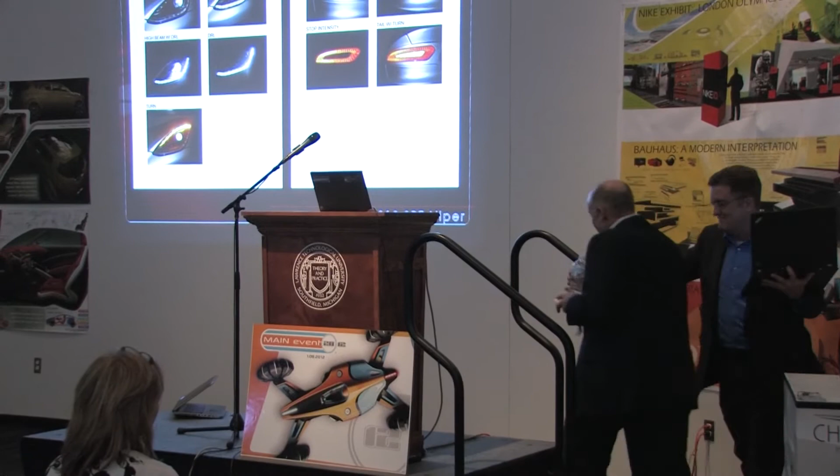Well, thank you, Paul, for that nice introduction, which I wrote, of course.

If any of you were at our winter event in January at the top of the Renaissance, I talked about the American car business being back. If you saw that presentation from Bob, you can see that we're back. And it's all credit to all of you in the audience who are car designers, engineers, management, who are in the auto business, that you stuck with it during the valley, and now we're riding the roller coaster up to the peak.

So I want to congratulate all of you for staying with it and for just designing great cars. And this is what I said at our winter show: the press is usually the last people to know these things. But it's on the cover of Time magazine from January, how America got started selling cars again. We never forgot how. It's just the market changed, and we're now the new growth engine for the American economy.

And I'm proud to say that Dassault Systèmes and our CATIA brand in particular is a part of that, and has been a part of the industry for 30 years. It just so happens that the North American Truck of the Year, the Range Rover Evoque, was designed using CATIA. And the North American Car of the Year, the Hyundai Elantra, also designed using CATIA. And of course our first speaker from Tata, they actually own Land Rover now. So you can see it's been a pleasure for us, and an honor for the Dassault Systèmes product line, and specifically CATIA, to serve your industry.

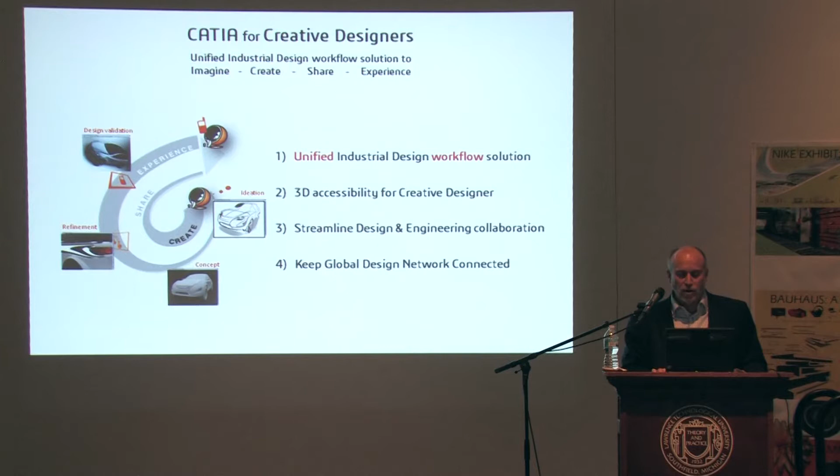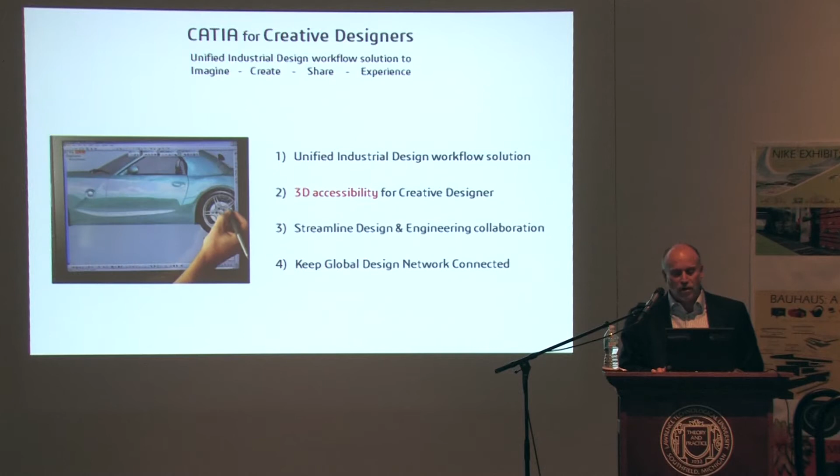We also want the creative designer to have access to 3D. Here's an example of a designer sketching on an existing car model. We want to help you design like you think. You think, hey, I want to change the roof line. What if I made the roof line a little taller? What if I made it a little shorter? This is how we think as designers, and these are the kinds of tools we want to let you use intuitively - what if I just pull this up a little bit more?

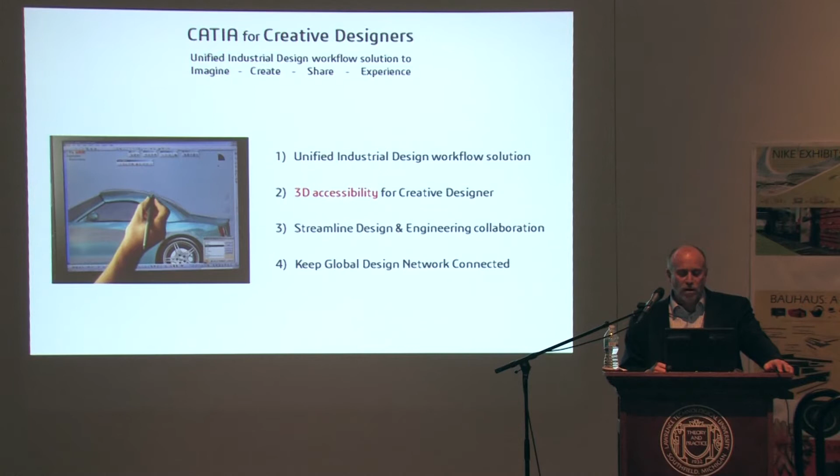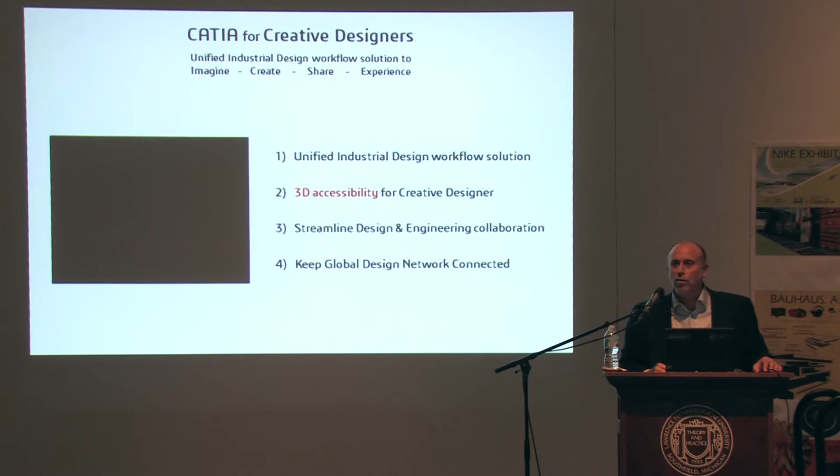You see sketching tools. My colleague Andre Clemens, my partner in the business, has been demonstrating our sketching tools, and he can give you a better hand with it. You can try it - I saw some people in the audience over there sketching. It's very easy to use, very easy to learn, so give it a try. We want to make that accessible for creative designers.

We've got to streamline this engineering and design collaboration. You may have seen these kinds of charts before showing what we call flow ruptures - when you design, then pass it over to engineering, then design some more, a lot of work gets lost in the translation during that handoff. So when people are using the same tools and it's more fluid, you get a more efficient design process that gets the product to market faster.

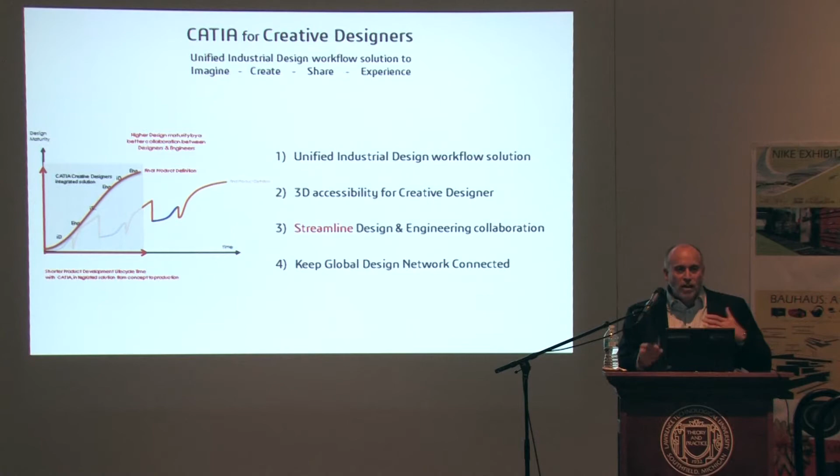We've found that people using this integrated approach get a better quality product, because the product is better designed and you have fewer problems down the road. Because engineering and design are working together, you still get the visual and design style you're looking for, but you also get a better engineered product through better collaboration.

In today's world, everybody's working globally. If you don't have a design center in another part of the world, you certainly have one in another part of the city, because you've got suppliers all around the United States, or certainly around the Detroit area. We offer the ability to collaborate and stay connected, whether it's across the hall or across the globe. So these are tools.

You saw some of that demonstrated this morning. In the Tata presentation, he showed an engineer and a designer collaborating and working together. So you've already seen this stuff, so I'm not going to show you all that again.

This is our end-to-end workflow in a little more detail. And we've added what I'm calling our community or our social networking approach.

When you're looking to get inspiration, when you're looking to get creative, one way to get creative is to connect with other people. I know that when you're trying to solve a problem, sometimes you just sit down with a couple of people with a whiteboard and start sketching things out, coming up with ideas to solve problems or fresh ideas just by working together. I think this is part of the design process, this collaboration.

So we offer tools for people to be networked together in a structured way. You can think of it as Facebook for engineers and designers. It's called our 3DSwYm solution, or our 3DSwYm offering. I'm not going to really demonstrate it much today.

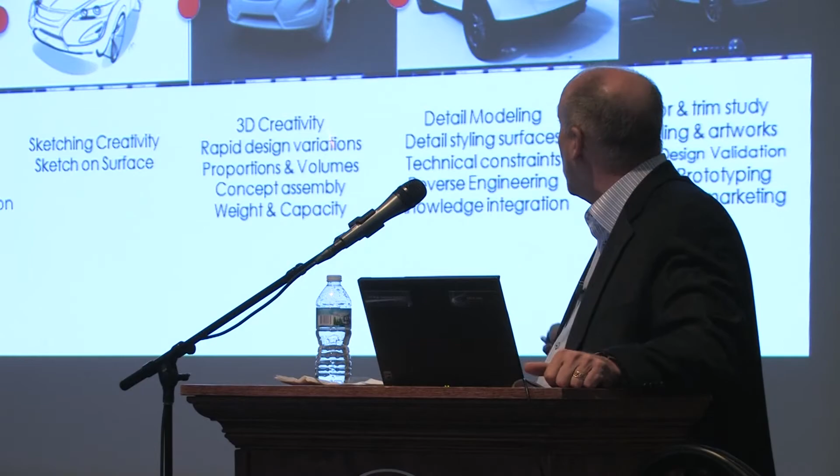We already talked about sketching, and we've got the sketching tools being demonstrated by Andre and Paul. We've got a very, very fast conceptual modeling tool that can let you get your models designed very fast when you're in the early stages of design. Very detailed modeling tools, those are our Class A tools, ICEM in particular, and then visualization to visualize your designs.

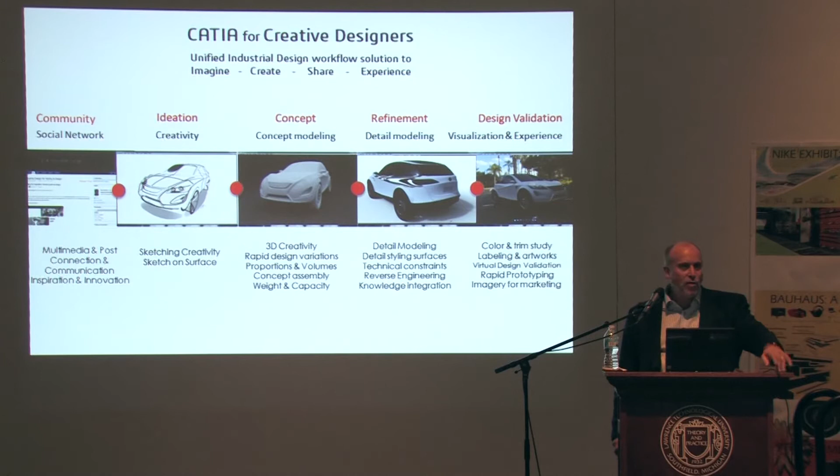And again, it's all on the same platform. I think we're demonstrating our rendering. Live rendering is running in the back of the room also. So a couple of these pieces are there on the workstations.

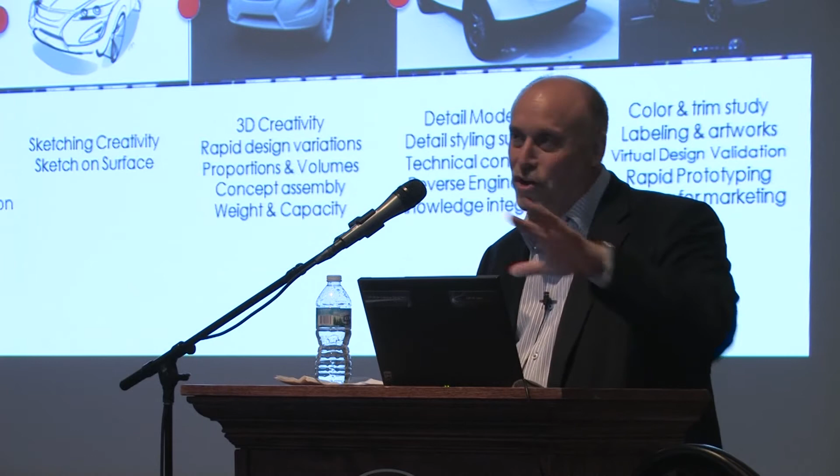Designing a car has a lot of parts to it, so we just picked a couple of the highlights that are most useful in design. And you can play with them, you can try them out while you're here.

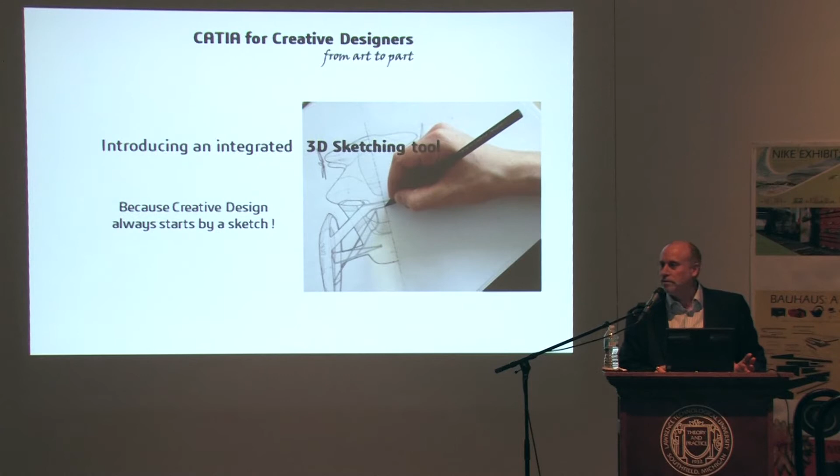So I'm going to give you a little overview of the sketching tool. There's a little teaser for you. We just introduced this about a year ago. And you start with a sketch—all start with sketches. So this is where you get your first inspiration.

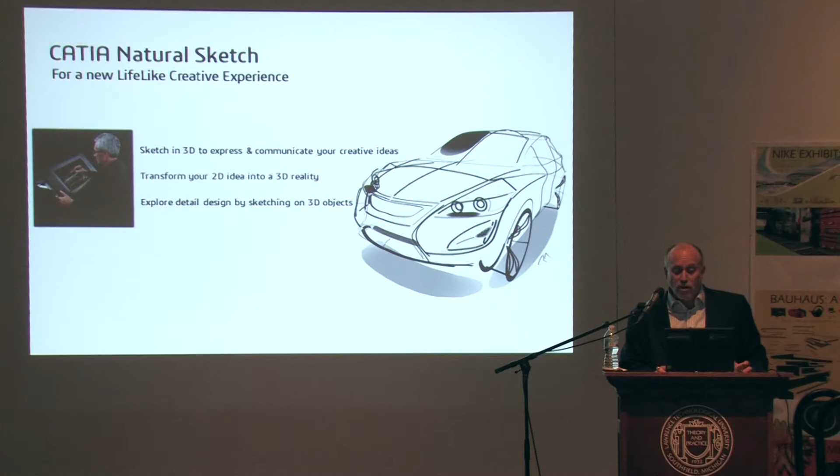It's the first time you take your 3D idea, the idea in your head, and you start to get it on paper or on a Wacom tablet or a Cintiq tablet, and start sketching. But what we've offered is the chance to start to sketch on 3D surfaces. So I'll show you a little demo here.

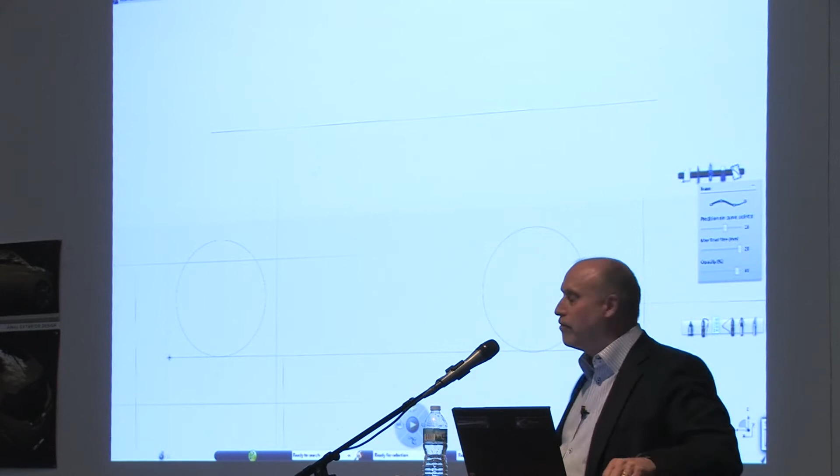Notice we also have a new user interface. We've created a brand new user interface for those of you that are longtime CATIA users. I thank you for your continuous input to make the user interface easier. So we've been listening, and we've started to create a new form of user interface. It's more intuitive—you can see it from icons, pencils, erasers, showing planes—just to make it a little bit easier and simpler for you to be a casual user.

So we've got shape recognition. I think we just drew a line, we drew some circles, and we've got a feature that will snap those to a geometric shape. If you turn that feature on, like any CAD system, we can duplicate things.

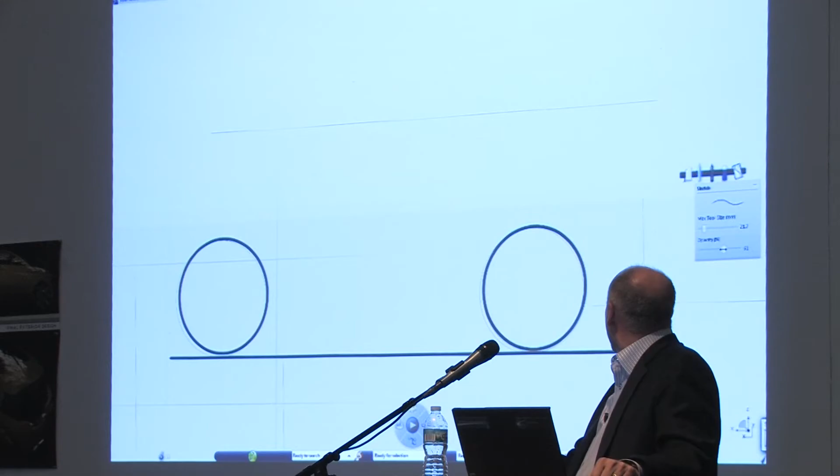We can sketch either in raster mode, which gives you a pixelated view, or we can sketch in a math mode, where you have an actual NURBS curve. So you can either have a raster curve or a true vector curve.

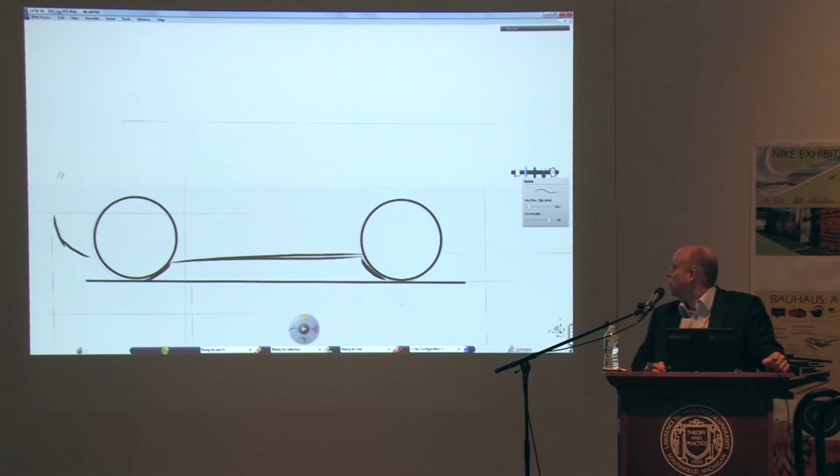So when you're just sketching, you're letting the pencil flow over the paper, if you will. This would be a raster approach. But when you want to switch over to a vector curve, you can do that so that your curve is a fully defined math curve. Or like some of our customers tell us, my curve lives.

So your curve can actually live in 3D space. You don't have to have it on a 2D sketch and then try to recreate it and hope it gets right. It actually lives. So we've come up with a profile here. You can also change the thickness and the opacity of the lines so that you can, in essence, shade the image, again, as part of the sketching tool.

So we're changing a few of these things around as we're sketching. You can also bring other elements into the model. In this case, he's brought a sketch of a wheel into the sketching space. So he's got a feature or a sketch element that he wants to combine with his freeform sketching. You can combine different elements together.

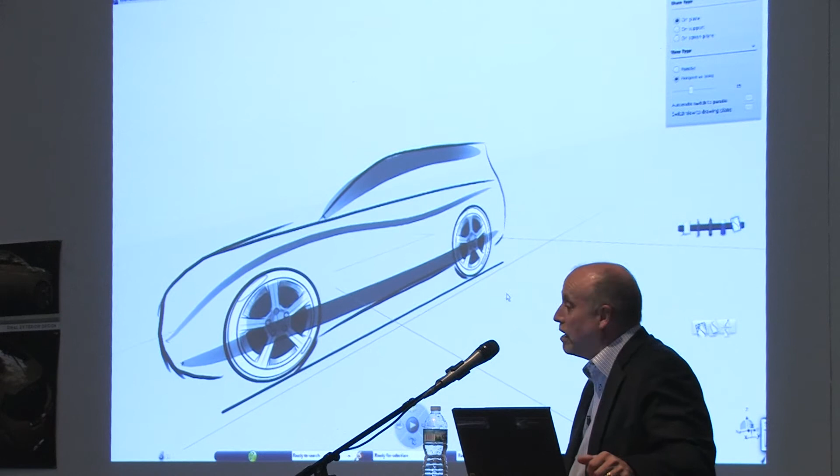Again, notice the simple menu structure here. The main pop-down menu only has 6 or 8 items on it. There is some other embedded things, but it's very simple, straightforward.

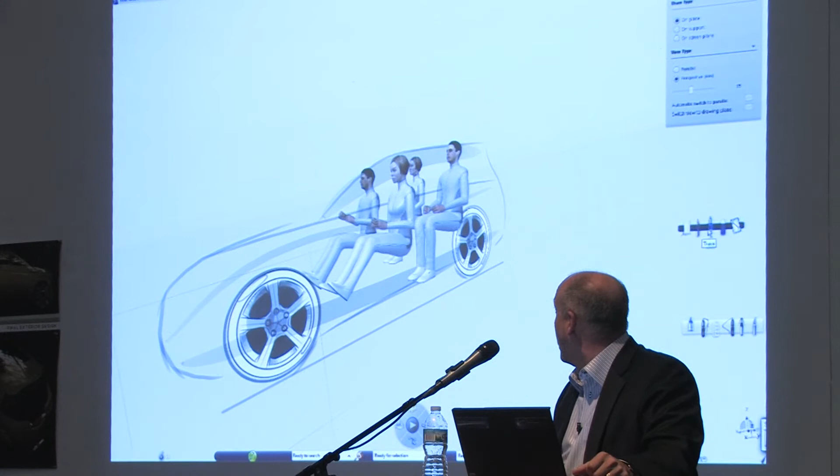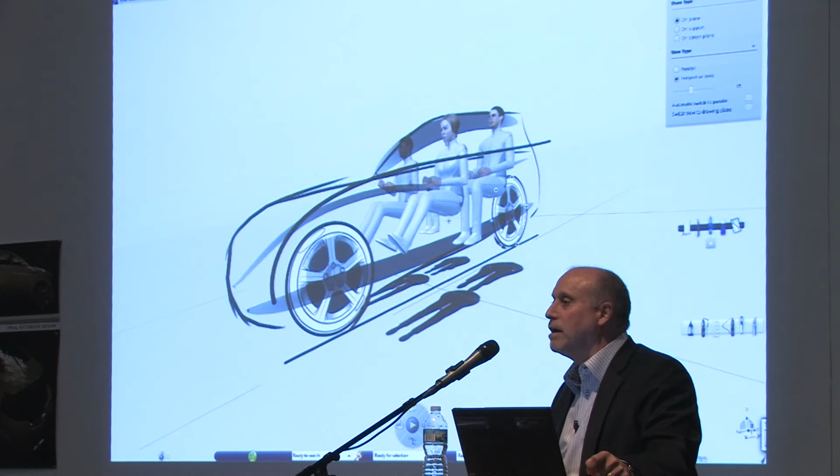So you're sketching on a plane, and of course you want to design your car around the human, around your customer, around your consumer. So we can bring in models of anatomical humans, and we have a solution for that also within Dassault Systèmes. So that mannequin that might have been used for reach studies in an engineering environment, we've adapted for use in design so that you can use it visually as well as geometrically.

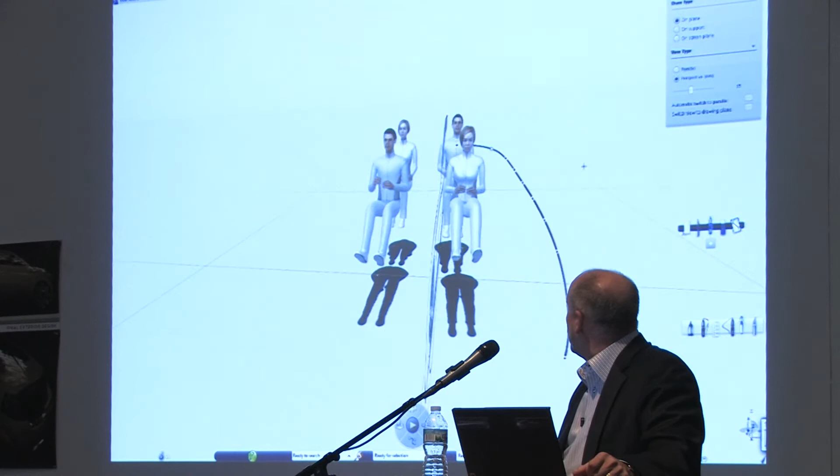And here you see the vector curve that I was talking about earlier. So you actually can start with this sketch curve and you can modify it and move it because it's a true vector curve.

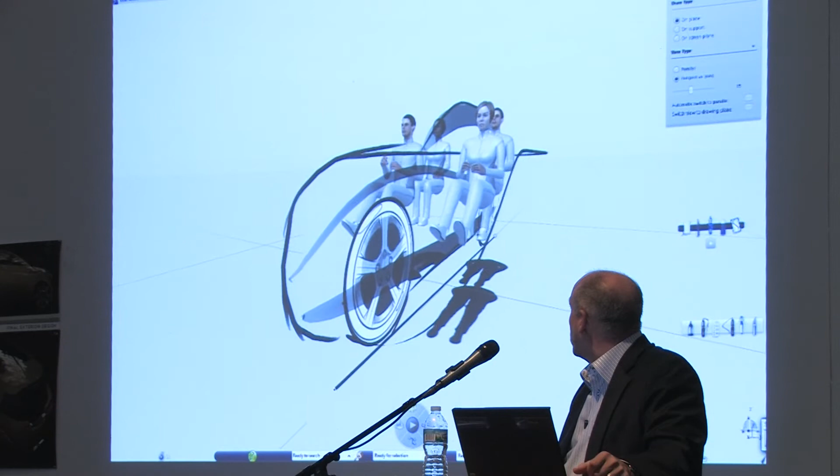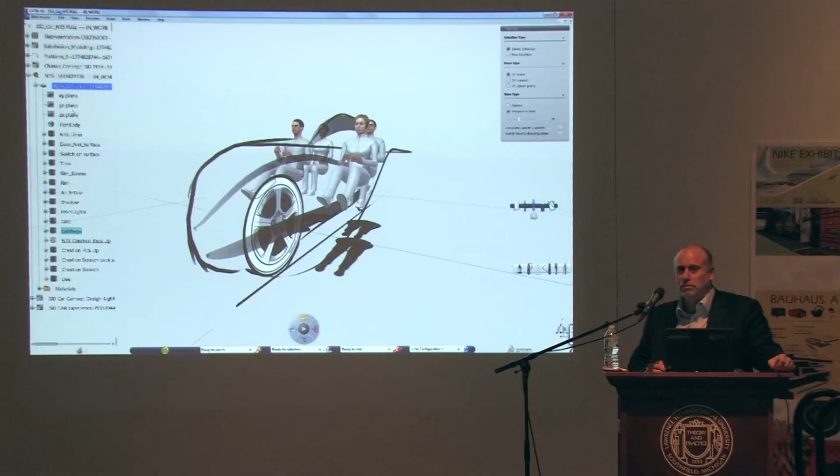Normally these videos are sped up. This guy's going slow, he's thinking a little bit. Oh, there we go. There, we skipped over all the intermediate steps.

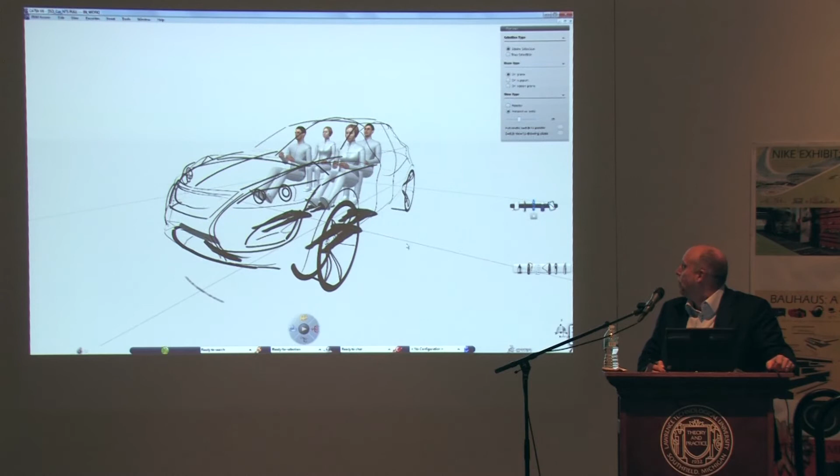So again, just so you get it, we're showing you some samples and then showing you a little more of a finished product here. But you see some other sketched wheels have been brought in, and some more curves have been built around the rest of the vehicle shape and form.

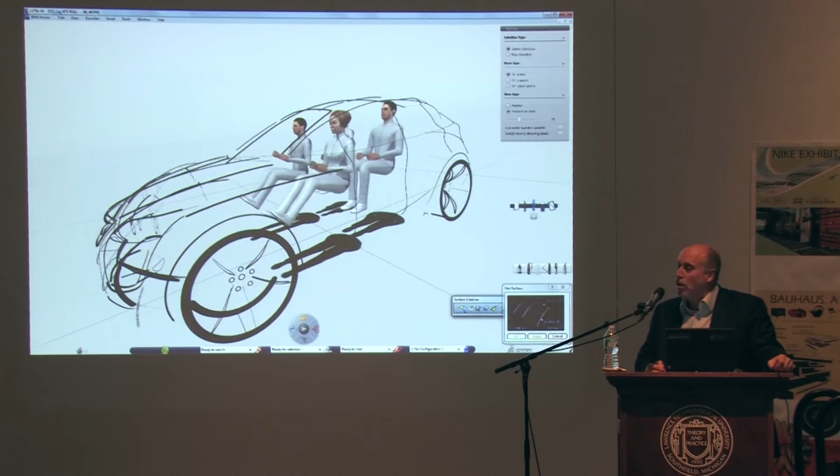So the other thing that's nice about this CATIA application is that all of the rest of CATIA is available inside the same interface. So here now we're going to bring in a very simple surfacing tool, which many of you have been using CATIA for years. You know we've got tons of surfacing tools.

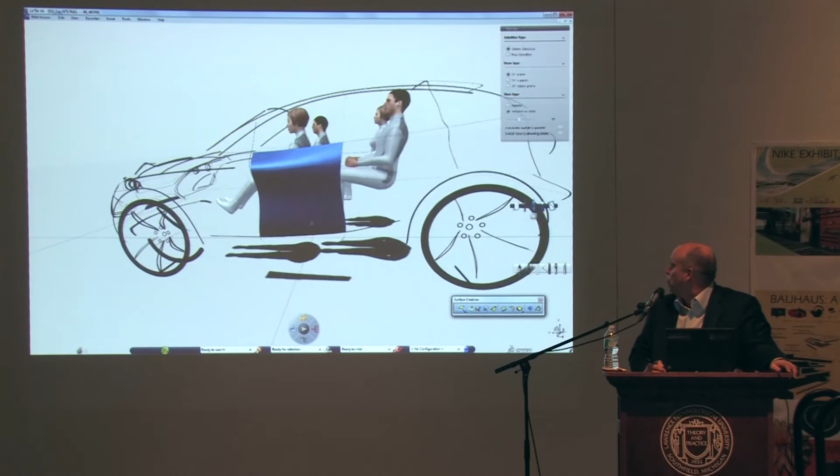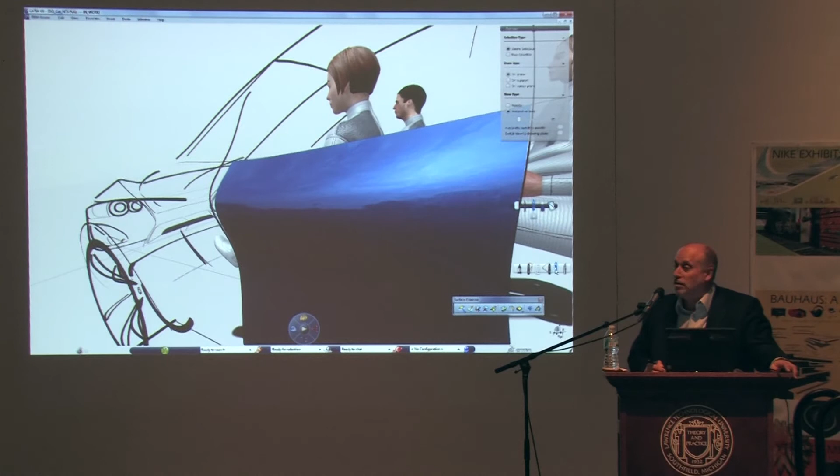So those same surfacing tools that you're used to using for very complex design can be used in a very simple form here to just sort of slab in a shape. And you can see that the rendering, full-scale rendering is turned on here. So you can see the image reflected in the shape, so that you can see and feel the shape of it as you're designing it.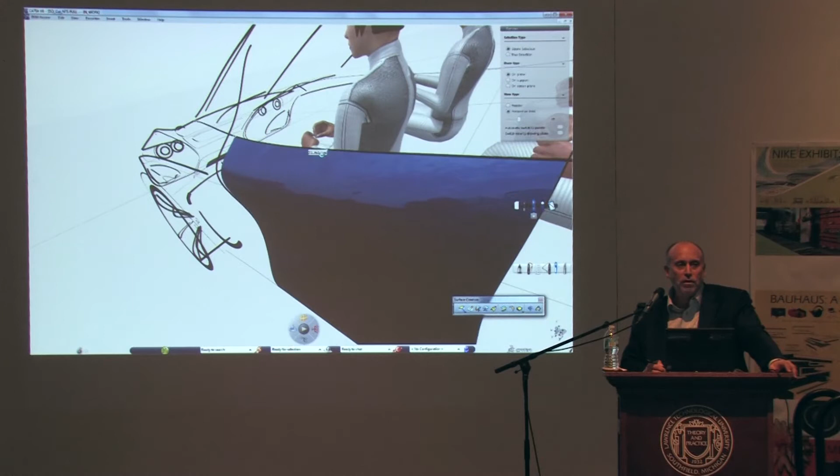And you can push and pull on that surface the same way as you saw us pushing and pulling on the curve, which again is the way that you might design in ICEM, which is the way you might design in a Class A environment. So we've offered some very simple surfacing options.

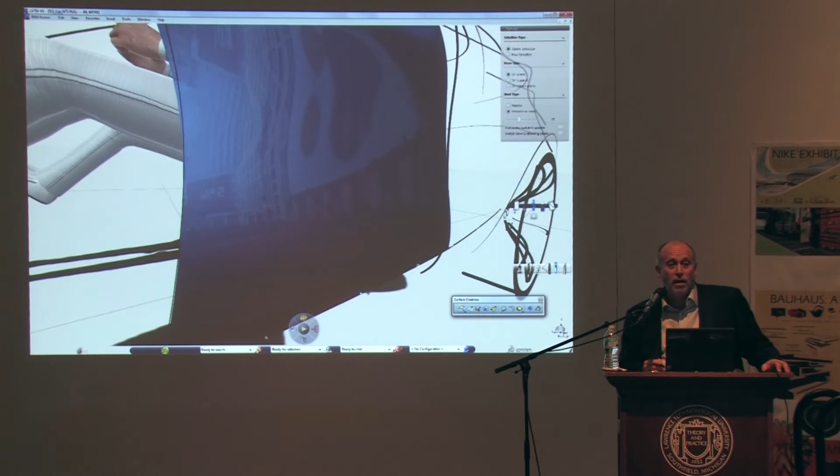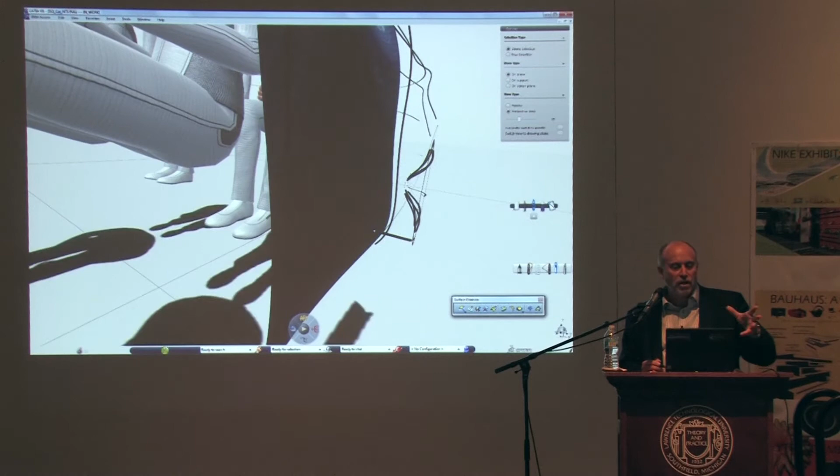So basically we took our full CATIA palette and brought it down to some simple things that you can actually customize, and give your creative designers as much or as little surfacing tools as they may need or you may think they can handle. Each organization is going to be a little different, but we've started to give our sketching customers a simplified set of tools that meets the kinds of requirements that they have, which is to get a basic shape put into the vehicle.

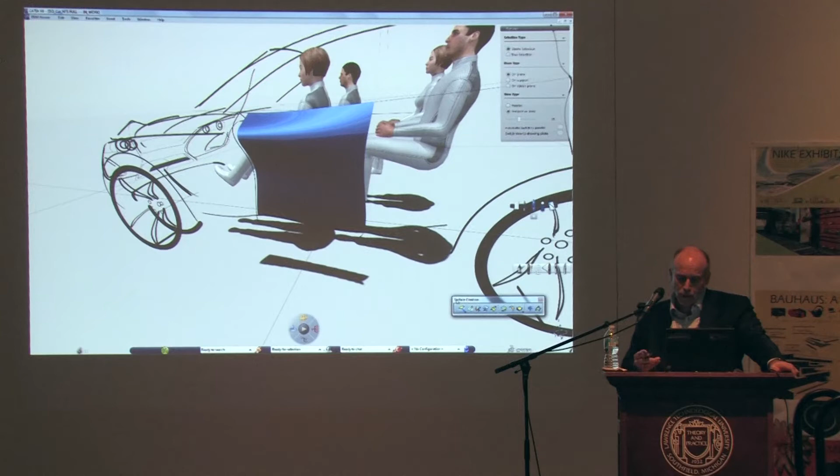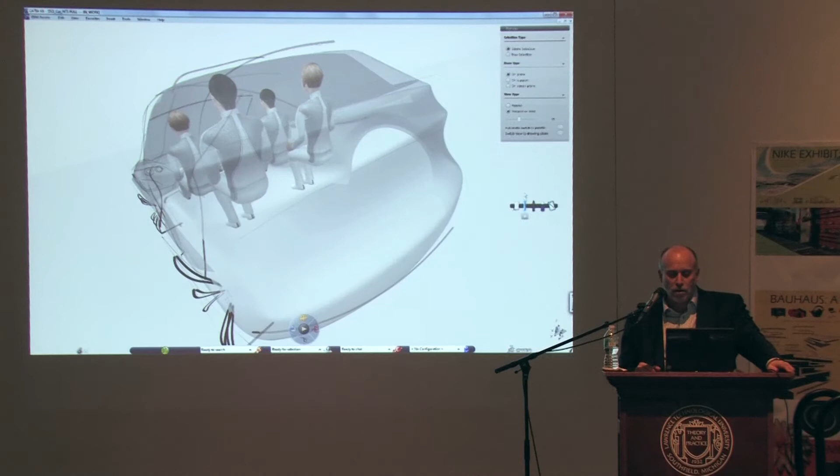So as you get more shape defined, we've skipped a few steps here. Now our designers created a full shape for the exterior skin. You can also draw on those surfaces.

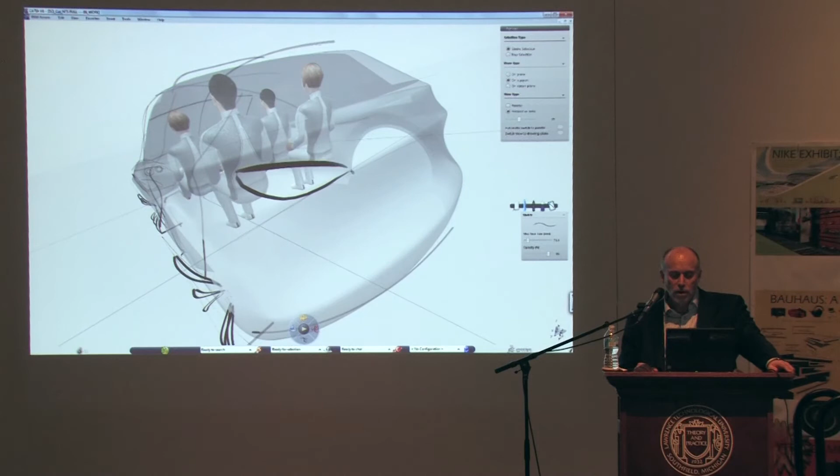So again, a typical application might be the development of your rear tail lamps. So you've got a shape for your rear fascia or your rear treatment, and you want to start to sketch some ideas of what your tail lamps might look like. So you can sketch on a surface and basically build the geometry right on the target surface.

So you see as he moves the model around, here he's got a little thicker line turned on, so it gives you almost like a paintbrush effect. But you see as you move the model around, those curves actually sit right on those surfaces. Design like you think. This is the way you would think as a designer, right?

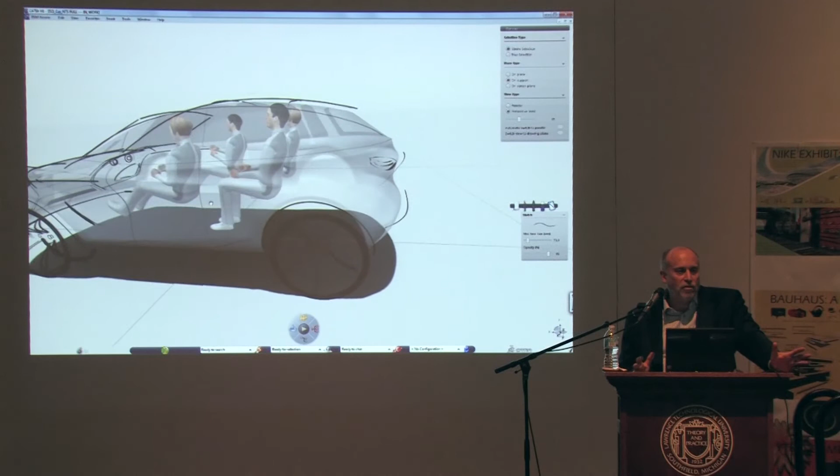So again, Andre, I think you guys maybe saw Andre back at the workstation. He's more than happy. We're going to be here with our sketching tools for all the rest of the day and all into tonight. I think we're going to be here all night, aren't we? How long are we going to be here, until about 1 in the morning or something? I don't know, I think the sketches are going to get better as the night goes on.

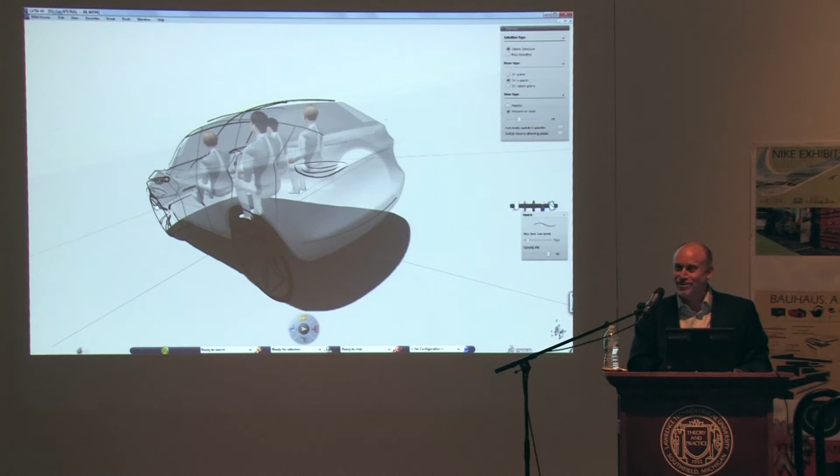We got the rendering tool running if you want to see rendering. I'll get to the rendering in a minute. So anyway, thanks, Andre, for being here and for being willing to come out and sketch it till 11 or 12 o'clock at night. So here's some comments from designers on our natural sketch tool.

Natural sketch gives me the reason to sketch again. It's more than a sketch, it's a communication tool.

I happened to be at one of our training sessions when we got that quote from a designer for Procter & Gamble who was so excited that this sketching tool was going to let him get back to what he learned in school, because he hadn't had a chance to do it. He'd been off doing project management. So these tools can be inspirational too. And if it sparks your creativity as a designer, it can help you get back to your roots, or get back to what you love to do, which is create.

Okay, so we covered ideation and creativity, let's say, our first block over here, a little bit with our sketching tool. Let me just talk a little bit about our modeling tools, our conceptual modeling and detail modeling tools.

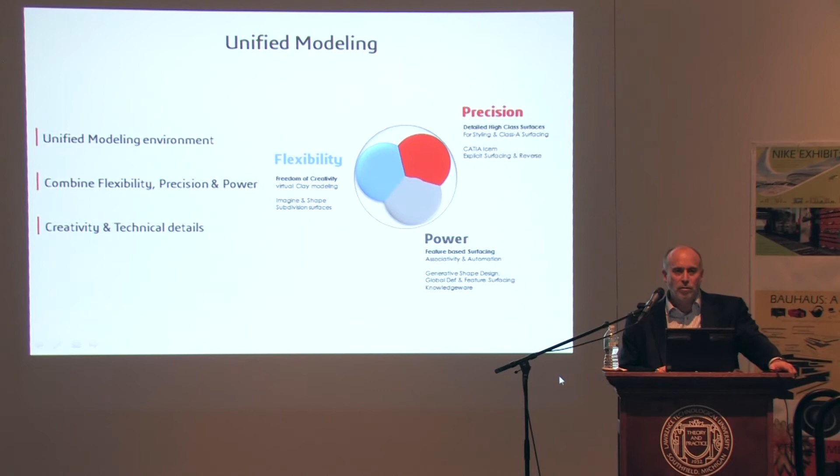So I'm just going to show you one example, again, along the theme of design like you think. This is our Imagine and Shape tool, our new conceptual modeling tool. Not that new, 4 years old, 5 years old now.

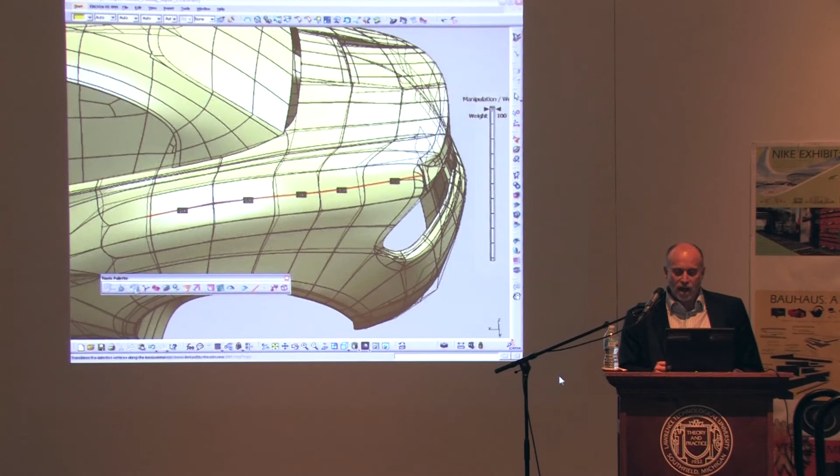But in this particular case, the designer is going to put a highlight line along his rear quarter. So you can subdivide these surfaces or these shapes, and you can then have that, again, see how there's a slider again, a new kind of user interface where there's a slider, and you can then have this line as firm or as soft as you want. You can have it be kind of rounded and kind of mushy like a clay, or you can have it very tight and very crisp.

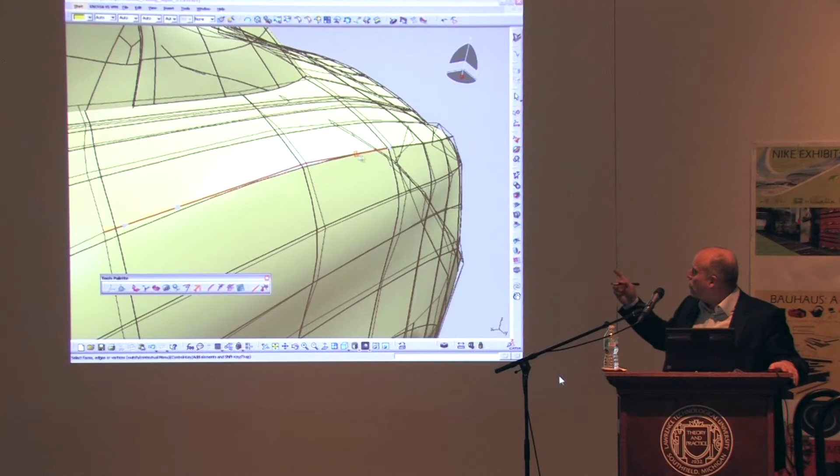And there's a slider that runs up and down the curve, so you can also wash the curve out towards the rear or towards the front. Which again, these were developed together with some of our European auto customers, describing to us the way they design. You know, I want to put a highlight line on a car, but I want it to wash out as I go towards the door, towards the back, whatever.

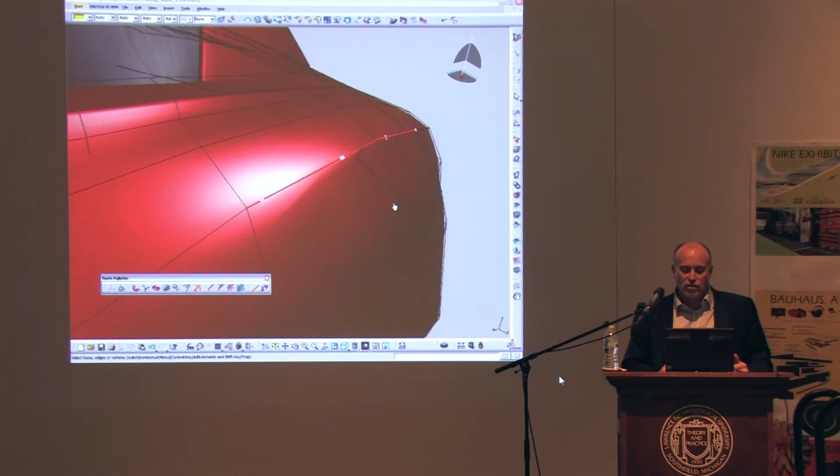So we went ahead and added these kinds of functions to our software so that you can create a car body or a Class A shape. In this case, it's G2 continuity coming out of our Imagine and Shape tool while you're still creating. This was developed in partnership with one of our auto customers. So again, we've got some Imagine and Shape running. I'm not sure we'll have time to get into that deep of a demo, but if you're interested, we certainly can help you out with that.

So we now integrate our ICEM tool, our full Class A surfacing tool, which has been in the market since the 80s and gives you the ability to do this all within CATIA. So I've got a little demo of our ICEM tool to go along the same theme of design like you think. So even in the Class A modeling area, we want to let you think naturally.

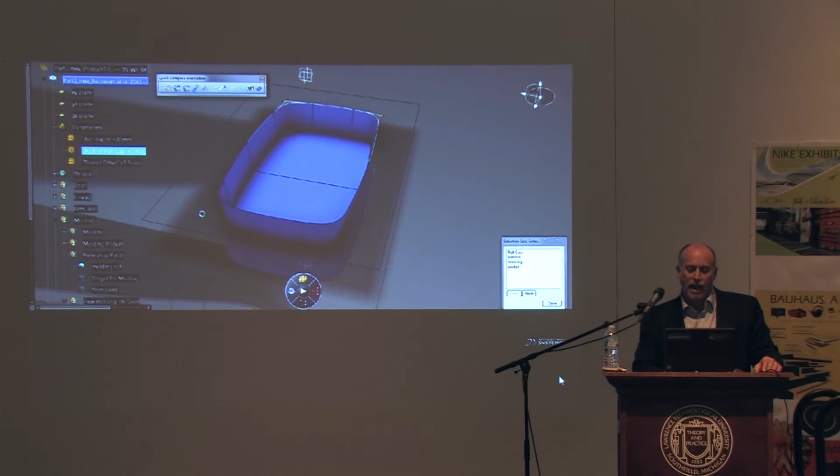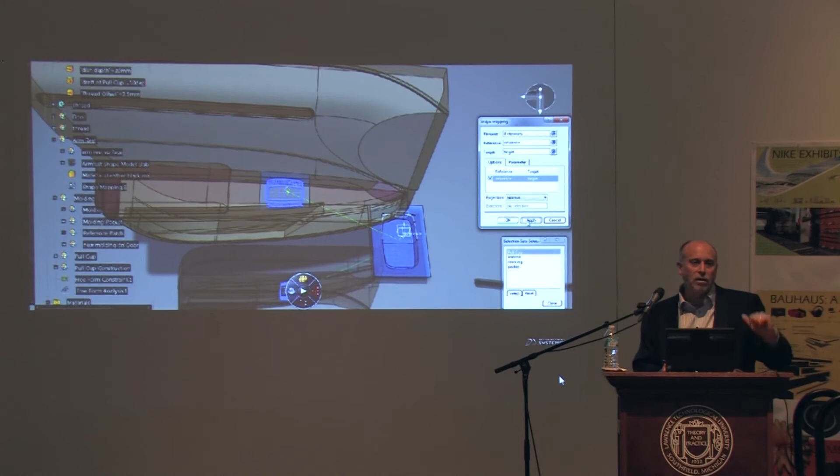Third example is a cup for, in this case, a handle pull, and we're going to put that handle pull cup onto a door handle. We've got this pull cup designed parametrically, and we want to map it to a target surface. Once again, our Class A modeling tools allow you to take that pull cup and map it onto another part, and then go ahead and style it from there.

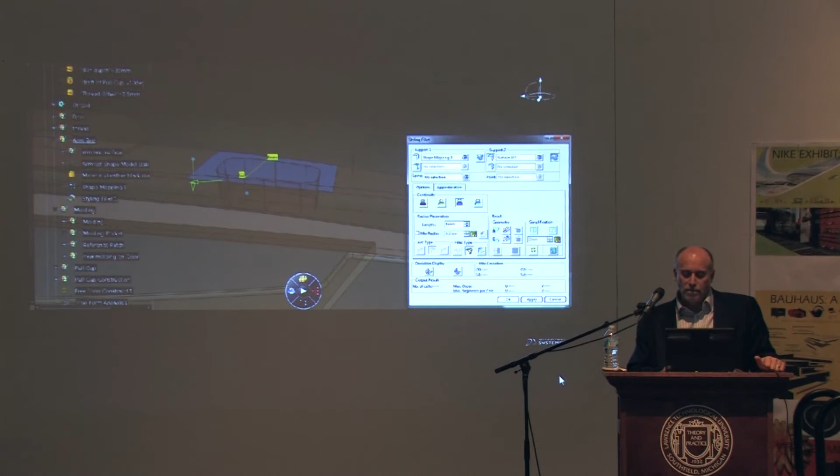He's going to put a styling fillet on it. We've got all sorts of options for how you can do all this. Again, Class A modeling - turn on the rendering and you can see what it looks like in real time. When you want to make a change, again, this is how you think: I want to slide that a little bit, can I make it a little wider, a little fatter, a little shorter? Just slide it, move it around, and the computer does the work for you.

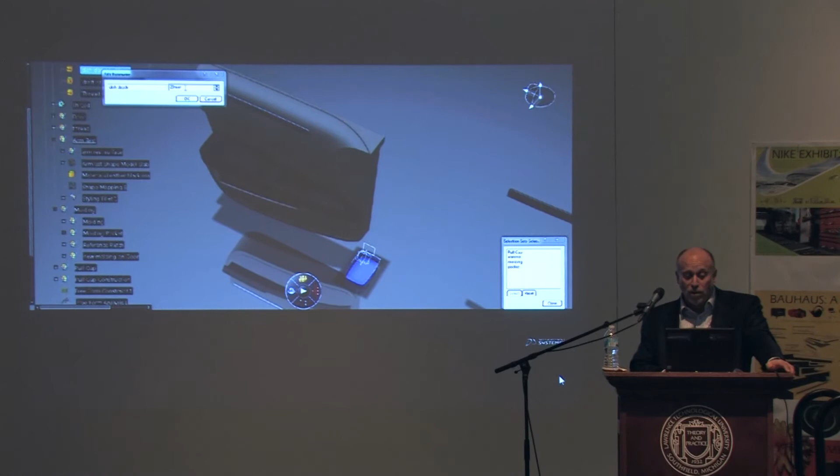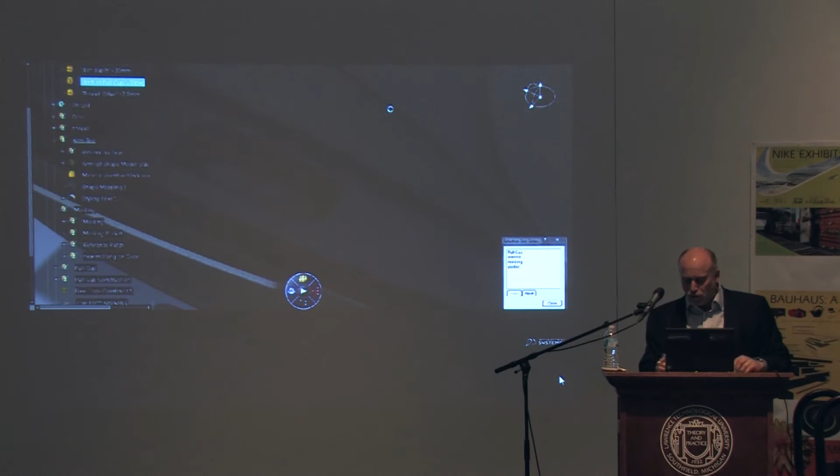So these are tools we've created to enhance productivity, to help you with your creativity, to help you innovate. Again, these are kind of nitty-gritty details. While we're hearing all these great designs of the next level Mustang, at the same time we still have to get the job done, so we're showing you some different tools and things we have to help you achieve the kind of designs you're looking for.

We had some students at a university in France create a car, which we call the ISD car - it's the name of their university in France. This is a little summary of how all these things come together, all these different options available to you using our shape tools for auto design. We'll take a quick run through of them all - I already dove into a couple of the detailed ones. So we start with sketching, the hard lines of the car, the main feature lines of the car.

So again, we talked about CATIA ISOM, subdivision surfaces, which is our Imagine Shape modeling tool. You can use these things together. Here's an example of some emissive lighting. When you're rendering, you saw big lighting studies from our previous presenter. So you can let the computer do a tail lamp and have emissive lighting.

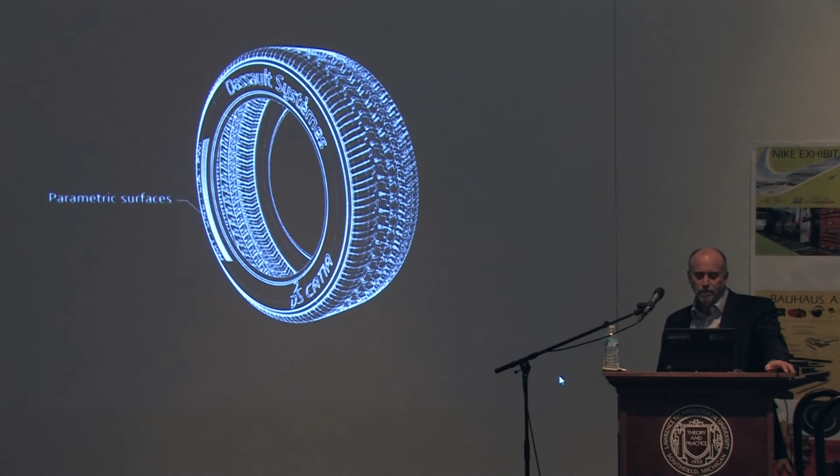Parametric surfaces, in this case a tire, which has got a repeating tread pattern, or a grill opening, where you can have a very detailed parametric model blended together with Class A modeling, so you can map a very complex grill shape onto a front fascia.

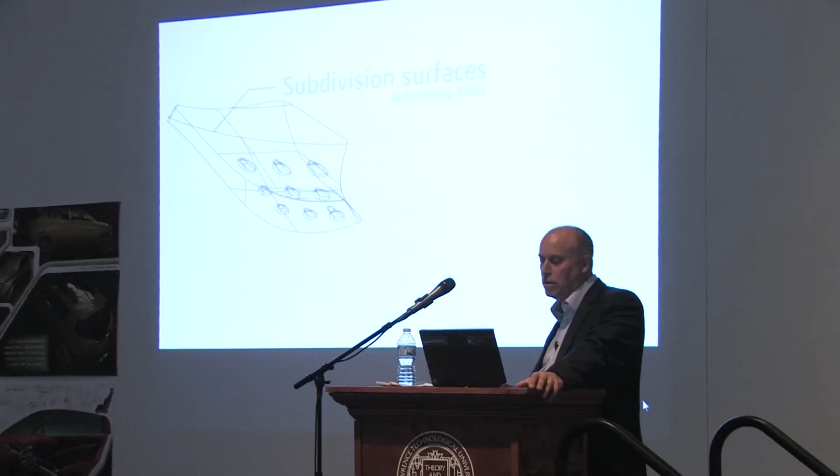Also detailed modeling here. We can use styling fillets together with sub-D surfaces and create all the details of something like a headlamp structure, and at the same time come back and render it and see what it's going to look like from a styling standpoint.

Here's another knowledgeware grill, real quick, and starting to show some rendering here of the final design. Doing some engraving, mapping. You can map stickers onto these surfaces, labels, stickers, engravings. Again, you can use all these different tools interchangeably.

And when you're ready to check out your design - oh man, that's really dark up there, isn't it? We use ray tracing to give you a photorealistic image.

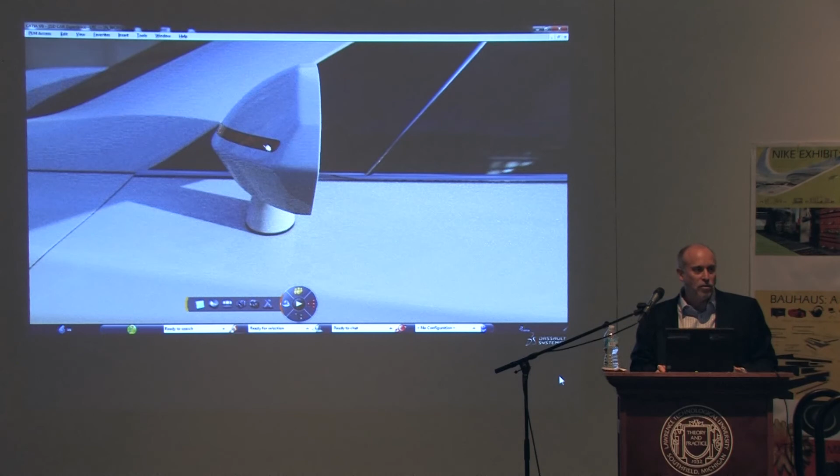I've got a few more visualization examples. You can use visualization not just for styling and design, but also for engineering and for sales and marketing. In the interest of time, we're not going to cover all these different uses. I'm just going to give you some quick videos, and then you can check it out yourself later in the back of the room. I saw some of our participants playing with the rendering tools even here this morning, so it's very easy to use, and you'll enjoy checking it out.

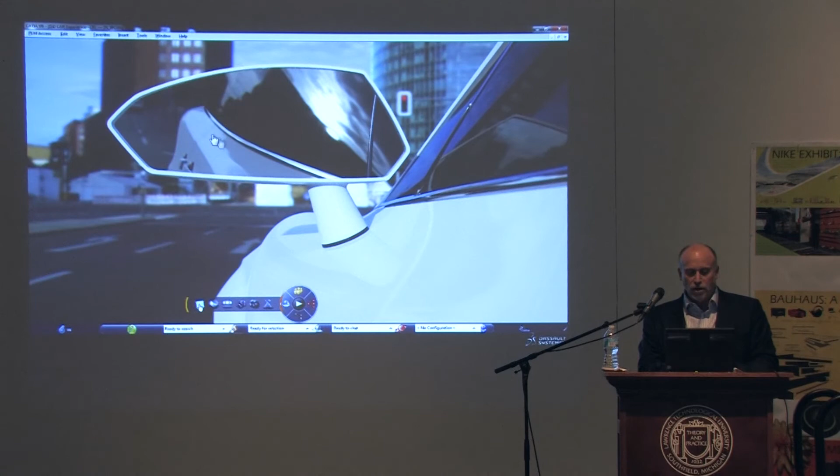Again, one of the nice things about this tool is that you can flip very quickly from rendering mode to design mode. So you can design, you can render, see what it looks like, go back, design some more. It's truly interactive, and it's available as needed. There's no data translations.

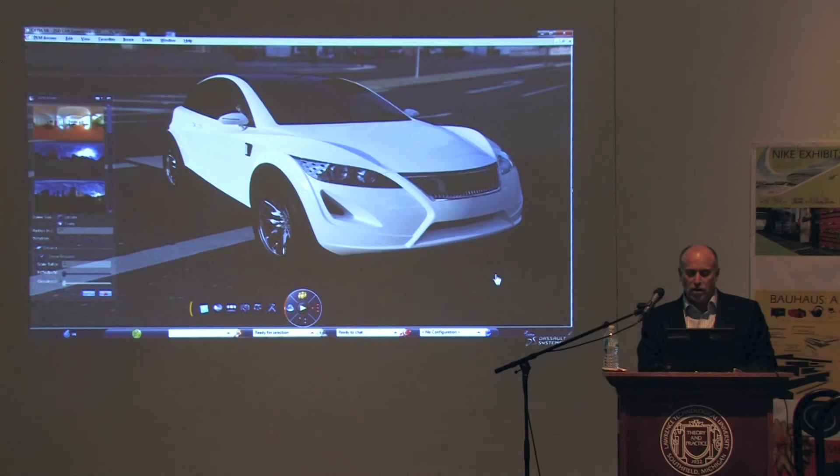Here's an example of dropping different backgrounds. You can have your car in any kind of environment that you want. They're called HDRI backgrounds. If you're familiar with these things, you can download them from the internet. You can get the ones that are available from CATIA, or you can take your own with a 360-degree camera.

So you can also make still images. In addition to using it interactively for design, you can use the tool to make still images, which could be used for a variety of purposes, including engineering studies, like how the instrument cluster is going to look when the sun's shining through the windshield. Here's another example of a lighting study.

And interactive reviews on power walls, or you can get a diamond ring to give to your virtual girlfriend. That's much cheaper than the real thing, but I'm not sure it'll be quite as impressive unless you have an avatar for a girlfriend.

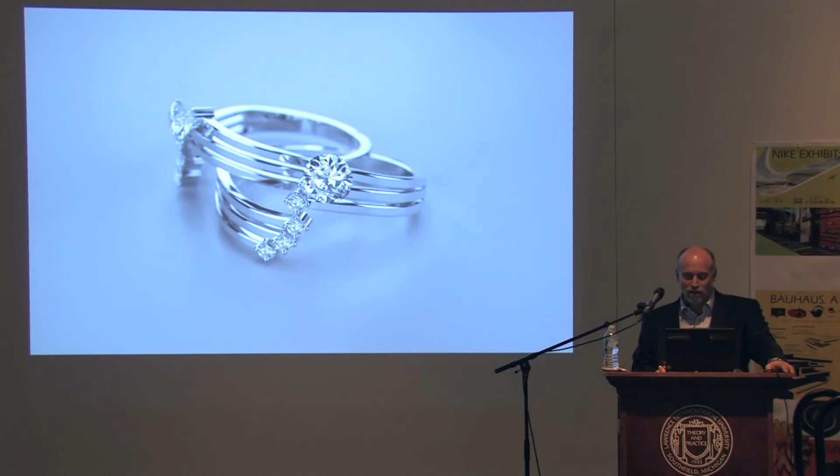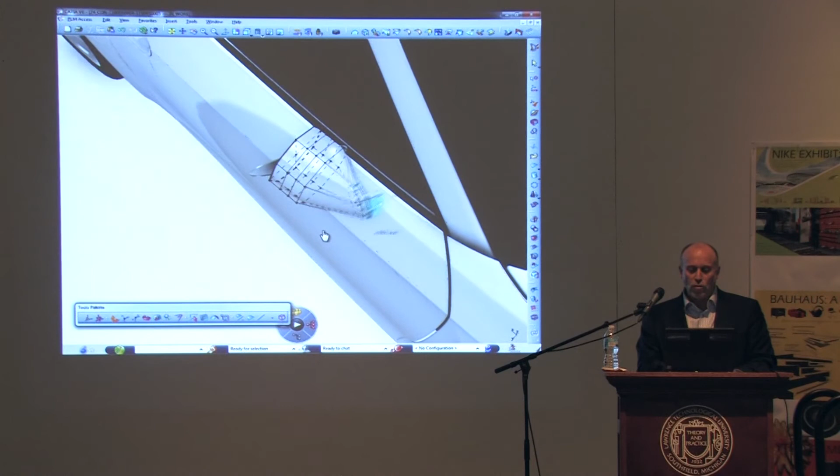We'll give you one more video that shows how this all comes together. Here's another live example of a mirror design. So we start with a mirror, and we start designing the housing around the mirror. We've got the mirror glass, and we've got the vehicle, and we start designing around it.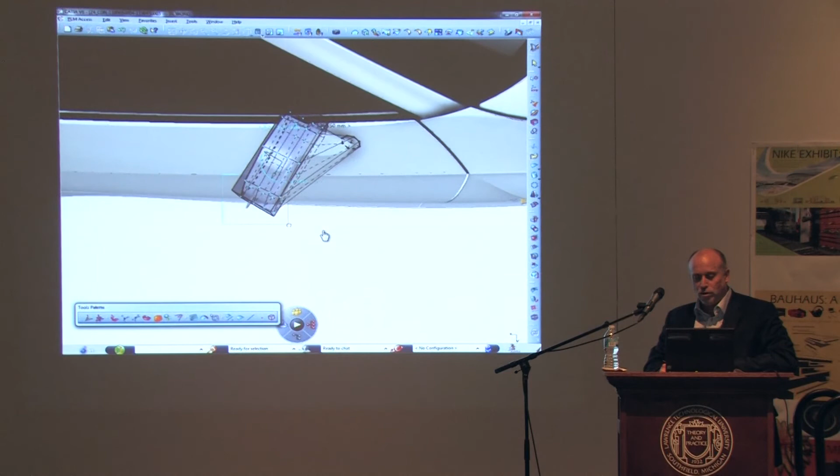So we start with our Imagine and Shape tool, and we start building that very, very fast, or ultra fast as we call it, modeler, which you can rotate, push, pull, and get this design sort of blocked in first. You can hollow it out, shell it, you might say, and then continue to design to match your glass.

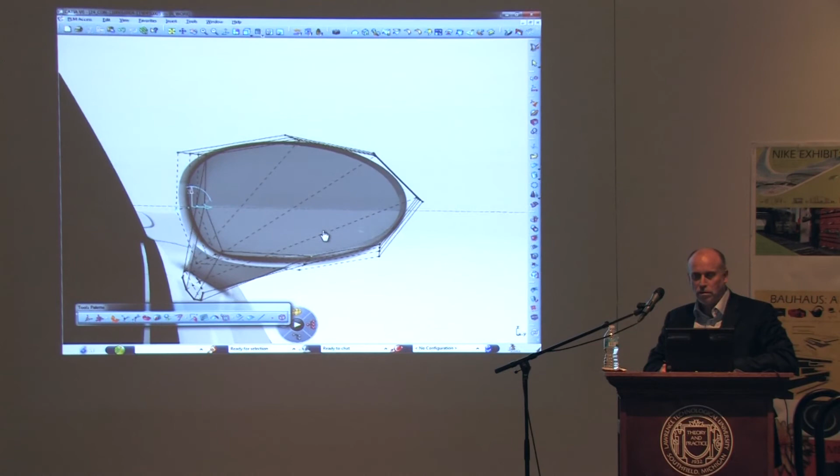So again, you can see it's very intuitive, very fast, easy to use. And Paul O'Donovan is in the audience ready to demonstrate this for you anytime if you want to see it later today. So we'll keep designing.

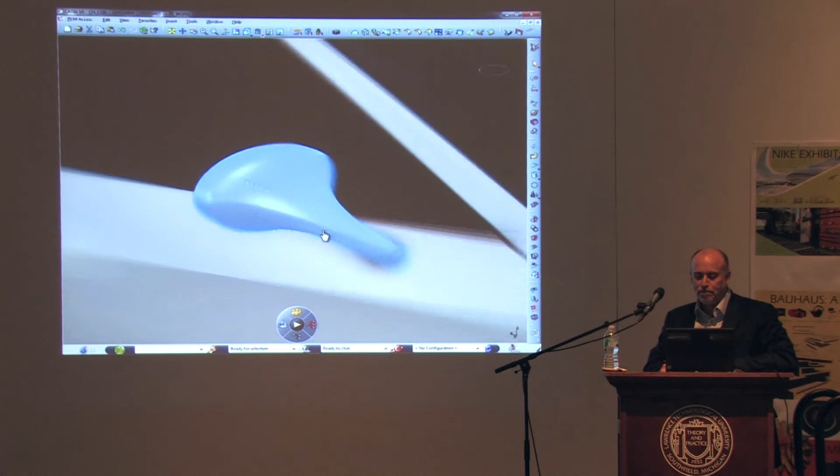We don't like it, we're going to stretch it, pull it. This is connected right to the body panel. Again, we're going to turn on the rendering. So here we turn on our real-time ray tracing, or our interactive ray tracing, I should say. And you can see that you now see it in a design environment.

We've got just some white lights turned on, so we put on some fluorescent overhead lights so you can start to maybe see the definition of the surface a little more. Notice that the mirror is reflecting off of the mirror itself, is reflecting off the glass. So this is all calculated and ray traced accurately using physics.

So we threw a styling fillet on there just to see what it would look like, because he thought the intersection maybe was too severe. I'm not sure exactly how you'd manufacture that, but he threw a styling fillet on there to see what that would look like, again turning ray tracing on and off.

So again, it's this interactive design, an interactive design session. It's getting all the tools that you need to be able to design like you think.

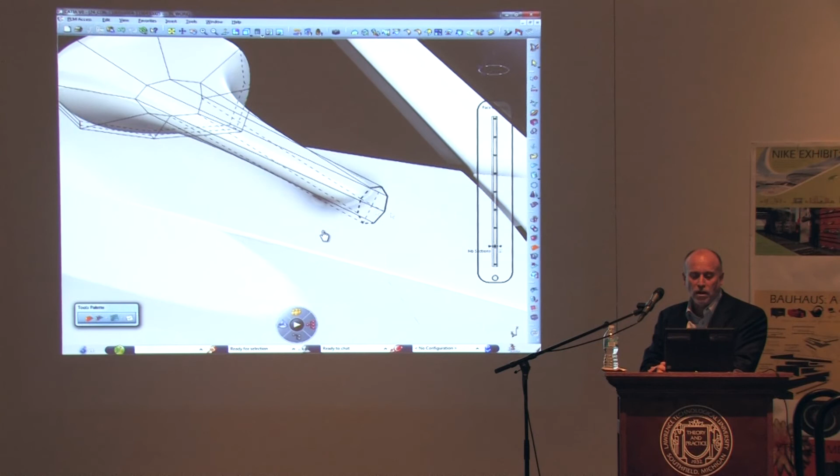Changing some continuities, G2, G3, again stretching it out. So you can just explore different concepts, and you can also store these in the model. If you want to have 2 or 3 concepts in the same model, you can store and capture them in the same model if you want.

In this particular case, he's just designing. Again, you use some Boolean logic, throw a hole in there. And I think we're going to see him also put a hard edge on the thing, using that tool I showed you a few minutes ago.

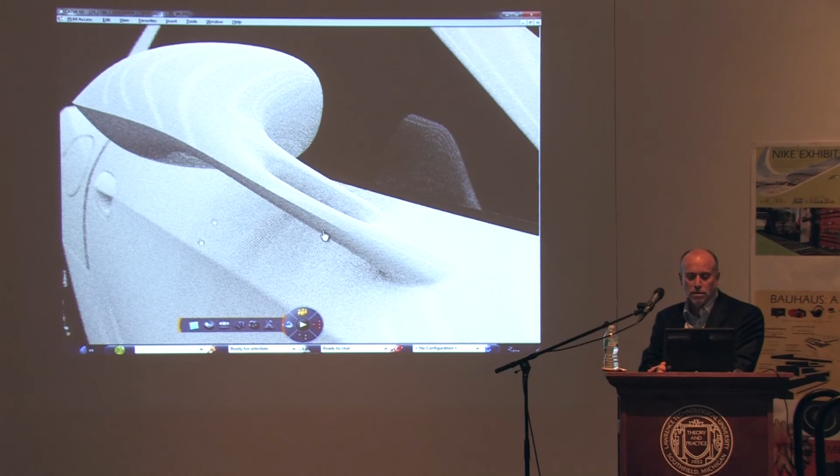So using a slider, you change the sharpness of that curve, again just to explore different design concepts.

All right, so now you've got a design that you like. Say I'm going to drop it in - let's drop it in a more realistic outdoor view instead of a studio view. So you drop it in front of a courtyard. In this particular case, it happens to be the courtyard of our Paris headquarters.

But again, very quickly, you can just drop that car out into a courtyard, see what it looks like in a different environment. Again, explore your design ideas, sell them to your management, sell them to the customer.

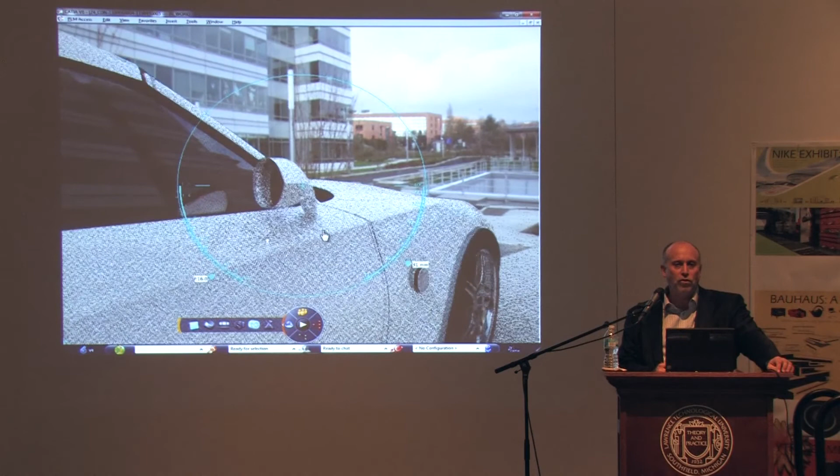We actually have some of our customers asking us to use these tools to do actual consumer testing, to do customer clinics, and have these tools available and actually be prepared to change the design at the direction of customers as a brainstorming session.

So these tools are so easy to use and so fast that you can actually use them interactively in front of clients.